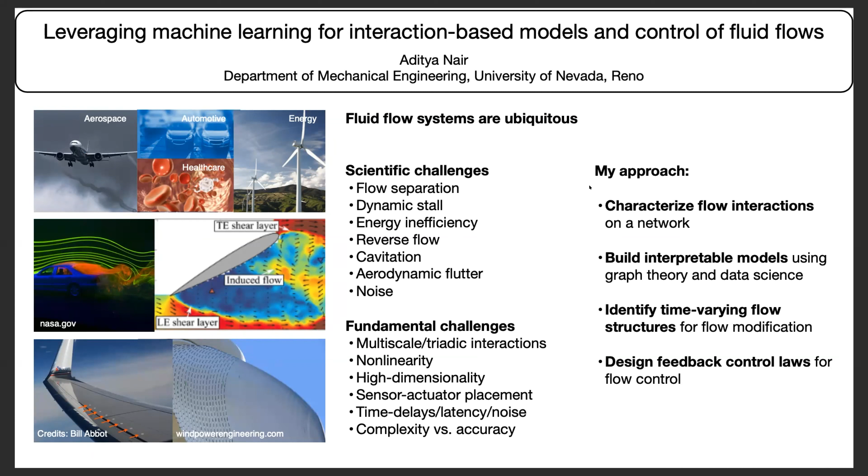My approach is going to be these fourfold points that I put out here, which is characterize these interactions on a network or a graph, then build interpretable models of these using ideas from graph theory and data science, identify some time-varying flow structures of significance for flow modification, and design some feedback control strategies.

Okay, so this is basically a big part of my PhD work. This was with Kunihiko Taira at UCLA, and my collaborator was Steve Brunton in these efforts. And if you see the left, these are some data-driven networks that we have extracted from laminar flow. So you have a body and you have a flow over the body. What we wanted to do is represent that on a network. Now you'll say, well, a network is made up of nodes and edges. What are the nodes and edges in continuum?

So what we did is we said that the modes of the flow are going to be the nodes. It was rhyming, so we were like, what the hell, let's do it. The modes are going to be the nodes, and the edges are going to be the energy transfer interactions between those modes. Kritika in the earlier talk gave a beautiful introduction on POD. We actually use proper orthogonal decomposition, or POD, to decompose the flow into modes. And then we basically perturb the flow to extract interactions between those modes. And that's what you see on the left.

And once you have the interaction graph, you can do some beautiful control, because you exactly know how energy transfers from one mode to the other. And what we wanted to achieve is this unstable equilibrium in these laminar flows, which gives you nice properties with drag. On the right, we show some physics-based networks, which is basically discretizing a turbulence network.

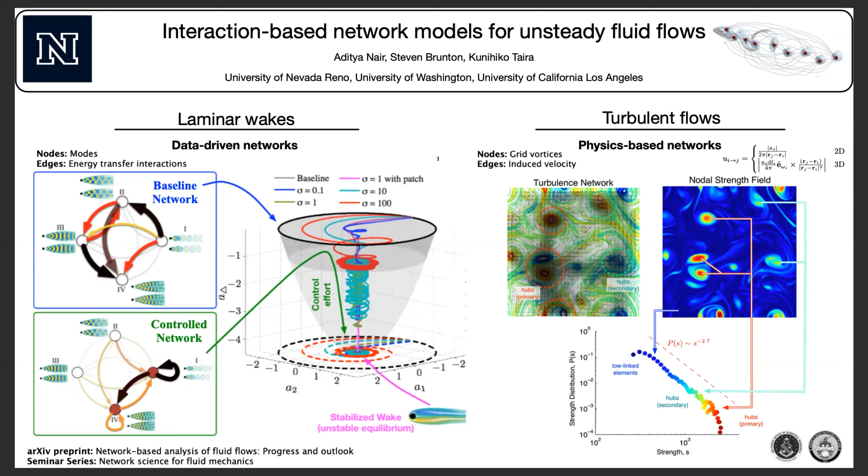Okay, so where do we go from here? We can represent fluid flow, or something that is a continuum system, on a graph. Now, where we want to go, at least in my group, is to take these ideas to multi-physics systems, in particular fluid structure interaction. So what if you have a structure that is compliant, that is flapping in this flow, and there is a fluid? Can we map the interactions between the fluid and the structure on a network? So that is kind of our initial attempt. This is just ongoing work.

I just joined UNR in 2020, so Sam is my first PhD student. So we've been attempting to build these kinds of interaction models of fluid structure interaction using a network framework. So now you ask, okay, you built these models for fluids, but how does that tie to a structure? It's not very intuitive. So what we do is we leverage ideas from potential flow theory.

And I mean, this is a theory in fluids. Basically, when you study an introductory course, usually you start with potential flow. But in potential flow theory, there's an idea where you can actually get something called the vortex-let strength of a structure if you have the structural displacement and you have an idea of what the wake vortices are. So we take a high dimensional flow, we take that information of the wake vortices and the structural displacement, and then once we have all of the information, our nodes become the vortices and the edges become induced velocity.

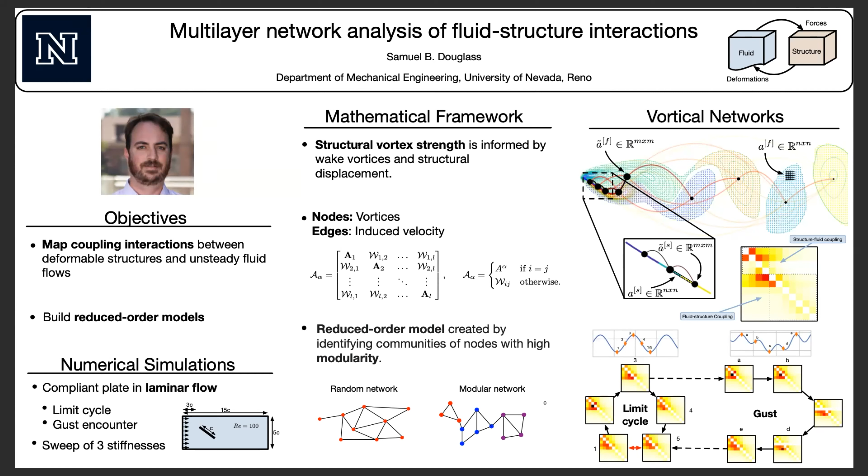And when you have that, you can actually build multilayer interaction models of these through, say, a limit cycle, so something where you have this periodic vortex shedding, or on the right, where you have, say, gusts entering the flow. So I basically hit the system with some perturbation or disturbance, and I can see exactly how this kind of network evolves over time. So, okay, you have a good representation of the interactions in this kind of, I want to say, 10 by 10 matrix. That's a good representation because, of course, if you have a fluid flow, you have a lot of degrees of freedom. It's a large system. But what more can you do with it?

What more you can do with this is you can leverage ideas from network theory to say, hey, what are the in degree and out degree strengths of these individual matrices, which is basically just a row sum and a column sum in this case, right? You can do more with it, but in this case, the out degree is just the summation of the structure to fluid coupling, and the in degree is just the summation of the fluid to structure coupling. And what it tells you is on the right of the figure. So you have two figures here. On the right end is the rigid body, and on the leftmost end is a compliant body.

Same case here. Here I have this addition of an external disturbance or a gust. So again, you have a rigid body and a compliant body. What it starts to do is it starts to identify these spikes when a gust enters the system. So that's pretty cool. As well, if you have just a periodic limit cycle happening in the flow, you can see that these in degree and out degree distributions don't have this large oscillation because there is no compliance associated with the structure. So the rigid case is pretty much flat. And then when you go to these more compliant cases, you start to see more and more periodicity or more and more fluctuations in this in and out degree.

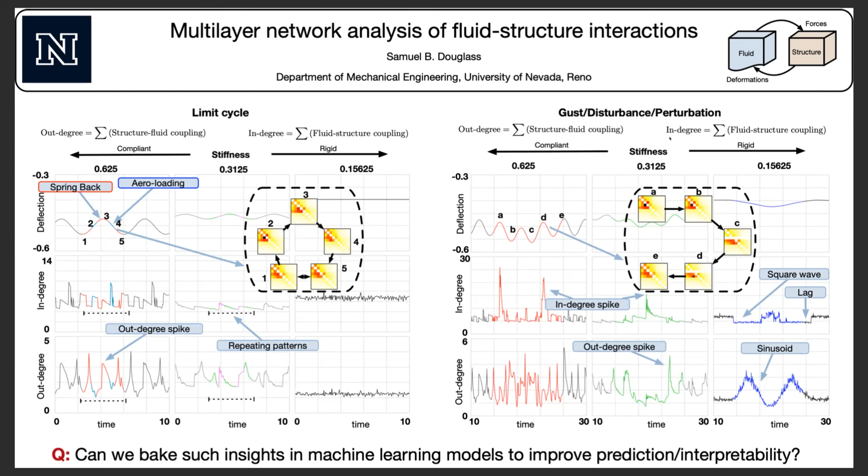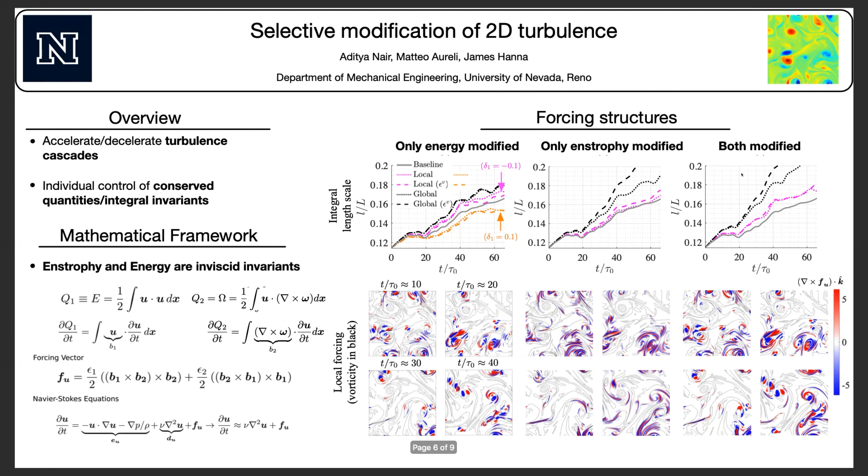It's super simple: once we can determine what B1 and B2 is, which requires knowledge of the invariants of the flow, we can force the energy of the flow separately from the enstrophy, or modify both together. So basically, there are specific structures that get excited when you only modify energy versus modify enstrophy or modify both. One of my students is working on extending this to 3D, basically 3D turbulence.

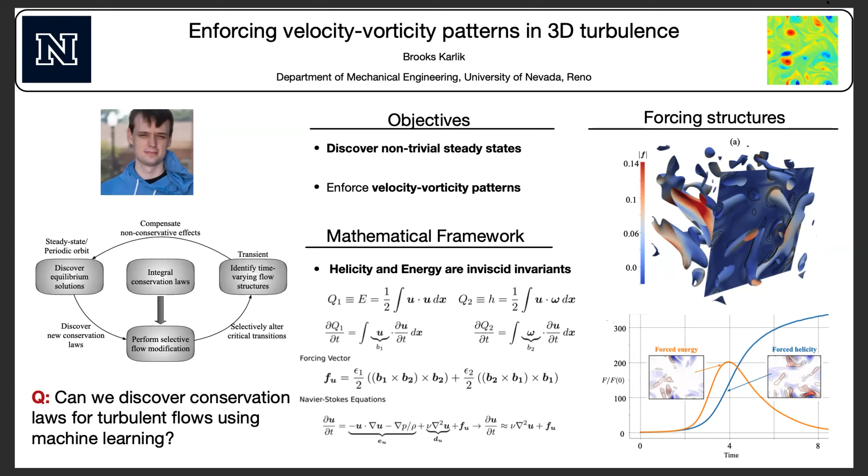So the idea is if you have an idea of what the integral conservation laws are, you can perform this approach and you can identify not only time-varying flow structures, but also discover some equilibrium solutions in the flow, okay? But again, everything that I'm showing here assumes that I have knowledge of the integral invariants or the conservation laws. But the main question that we want to drive towards is we want to discover these conservation laws using machine learning.

Okay, so this is an approach that again I'm super excited about, which is using data-driven ideas and network science ideas for flow control. Here, what I just showed you is basically a complicated flow, which is turbulent flows. We take that data, we partition that data, and we build control algorithms just from data; we basically control where these trajectories of the flow will go. So basically, I want the flow to go towards a low drag state by minimizing drag.

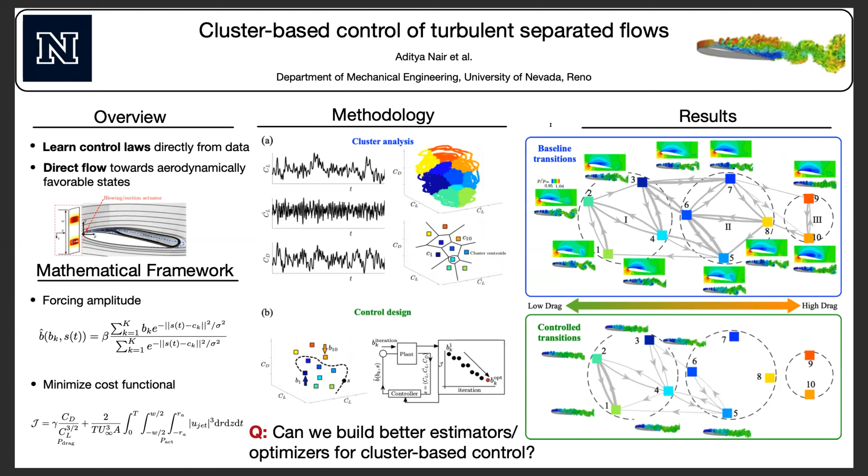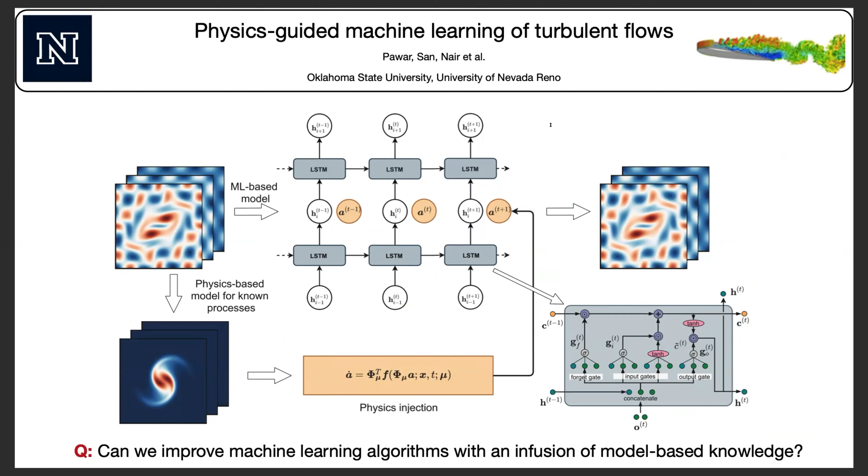So again, the idea would be, can we build better optimizers and estimators for flow control? John Wright talked about better optimization strategies. We want to leverage that for flow control. Again, there are machine learning approaches that I would like to bake physics into. So this is physics injection. Can we infuse these ideas in machine learning? We have people that are coming into my group to help related to this AI Institute project, and I give the floor to Floris for this presentation.

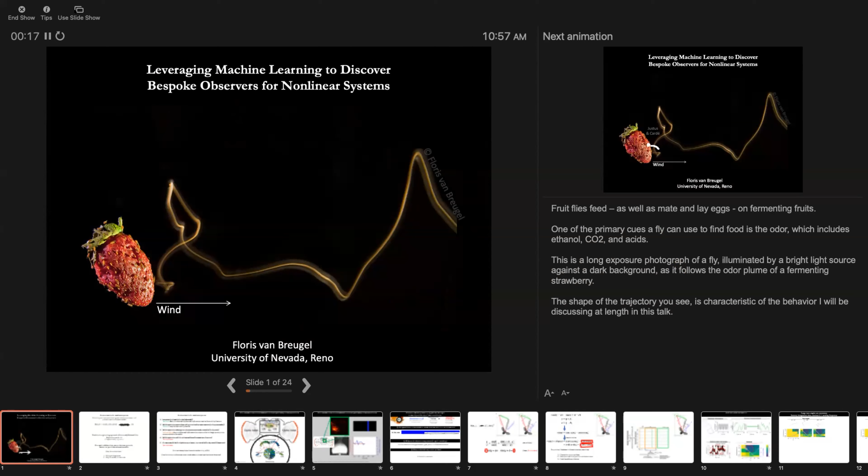Awesome. Sorry, I'm not sure exactly what's happening. There you go. The presenter, and it's not going out. Oh, I think my computer's just thinking too hard. It's still thinking. Okay, I don't know where my mouse is now. Oh, there it is. All right. There we go. Sorry for the technical issues. Can I move this guy?

There we go. Okay. So I'm going to tell you a little bit about some of the stuff I've been thinking about recently. My work is a little different than most of the people that have presented so far. I work at the intersection of control theory, data science, insect behavior, and neuroscience. I'm going to try and tell you how they all fit together in my mind. I think best when I think about very specific, very concrete problems, so I'm going to tell you about one today, a little less broad than some of the other talks we've seen.

But one of my goals with this AI Institute is to figure out ways of using machine learning and AI to take the very specific concept here and generalize it to bigger problems, and that's where I'd love to collaborate with people. What you see in this photograph is a long exposure photograph of a fruit fly following an odor plume upwind towards the strawberry. You see a couple patterns in that behavior that are very characteristic. This moving back and forth, this zigzagging, we call casting. Traditionally, that's been thought of as a mechanism to help them find the odor plume. But I think there's more to it than that.

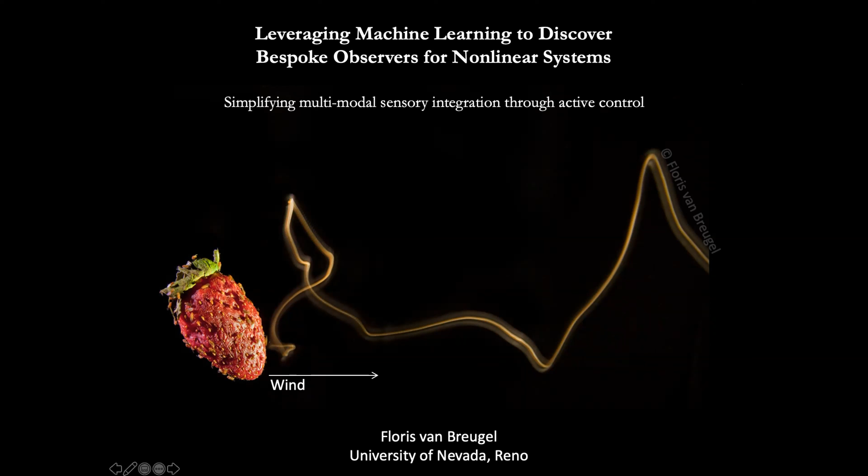What you can't see in the picture, but as a cheesy cartoon, I've overlaid a simulation of a turbulent odor plume. The challenge the insect is trying to solve is how does it figure out where the source of that odor plume is when it only has access to individual measurements as it's flying along. There's no gradient for it to follow. It's a very hard problem. A big part of that problem is for the fly to figure out where the wind is coming from, because that is generally where the odor plume is coming from. I've worked most of my PhD and postdoc on how the fly follows the plume, but now I'm interested in how the insect figures out where the wind is coming from, because that's really the fundamental problem in this challenge, in my opinion.

So this ends up being a nonlinear state estimation problem. And so for those of you who aren't familiar with this kind of terminology, what the insect is trying to do is estimate an unmeasured state given other measurements, presumably with some access to some kinematic or dynamic model. So mathematically, how do you take some, say, 3 measurements and put that through some nonlinear function and get some estimate of some other measurement that you don't have access to?

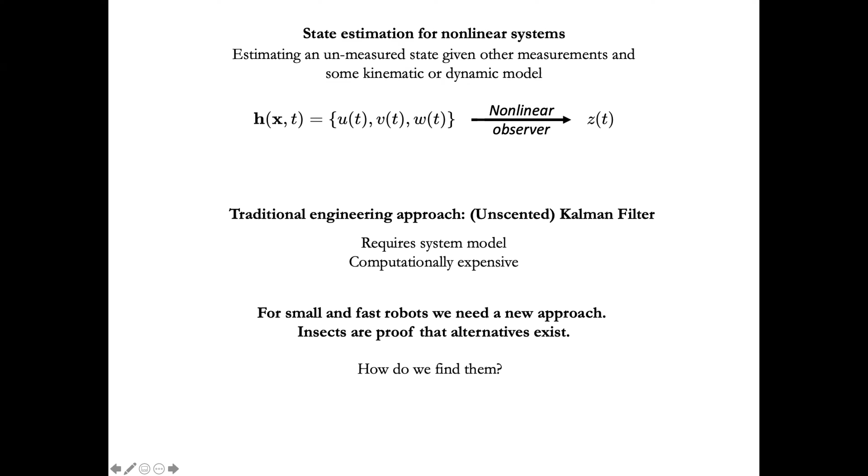So a traditional engineering approach might be to use, say, an unscented Kalman filter that requires a system dynamics model, and it's computationally expensive. And so I want ways to solve this problem that you could run on a small robot very quickly. Insects are proof to me that these alternatives do exist, but we have to find them.

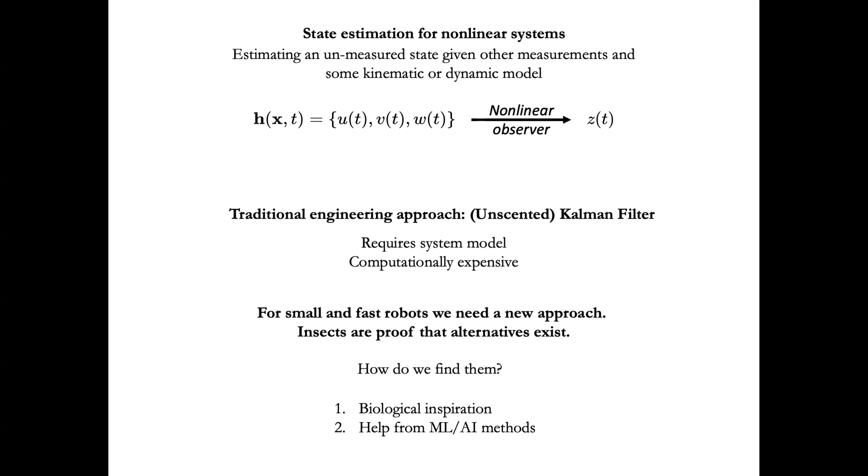And so I believe there's, in my mind, two options. One is looking at insects for biological inspiration. So that's what I'll tell you about today. But I think we can learn from that to generalize this idea using machine learning AI methods. So there's a few steps in this process. The first step is we should know whether or not it's even possible to solve the problem we want to solve. So there's tools for that, nonlinear observability, Gramians, and so forth. We're not going to talk about that today.

The next question is which trajectories are most feasible for actually solving the problem, given noise-free measurements and a system model. For that, we do have tools. The empirical observability Gramian is one. There's definitely relationships to what Krithika talked about. We're not really going to talk about that today either, because it's solved.

Then the next slightly more complicated question is which trajectories are best, given that you have very noisy measurements and you have no model of the dynamics. So that's what I'm going to mostly talk about today.

And then moving beyond that, which I'll also talk a little bit about, what trajectories enable the existence of a closed form nonlinear observer, one where you don't need a system model, you don't have to do iterative methods, you just get the answer because you've simplified the problem to the point where there is a closed form solution. And then can you do all of this just with data without any knowledge of anything else at all? So those are some challenges I think are interesting.

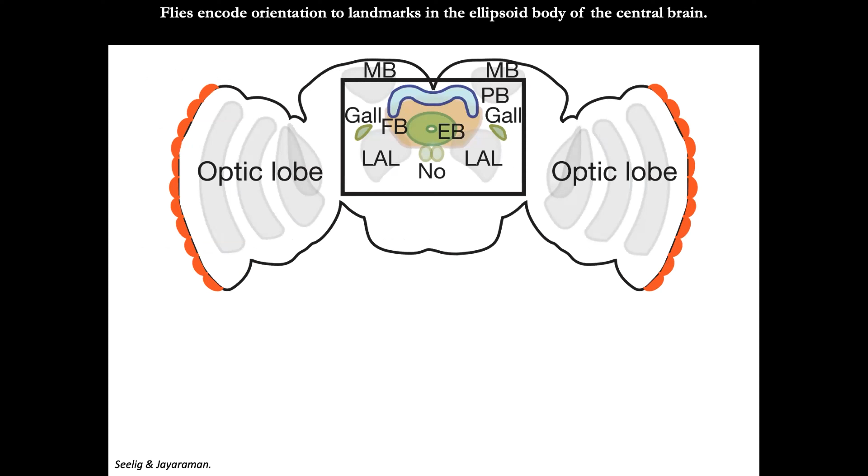So now let's dive into this concrete example. How might an insect or an insect-sized robot figure out the direction of the ambient wind given the information they do have access to? So if you look at the fly brain, we know a lot about fly brains now. And so right in the middle there's this object called the central complex, in particular, this little donut shape called the ellipsoid body. And in that region of the brain, they're encoding a lot of angular information, directions of different sensory modalities.

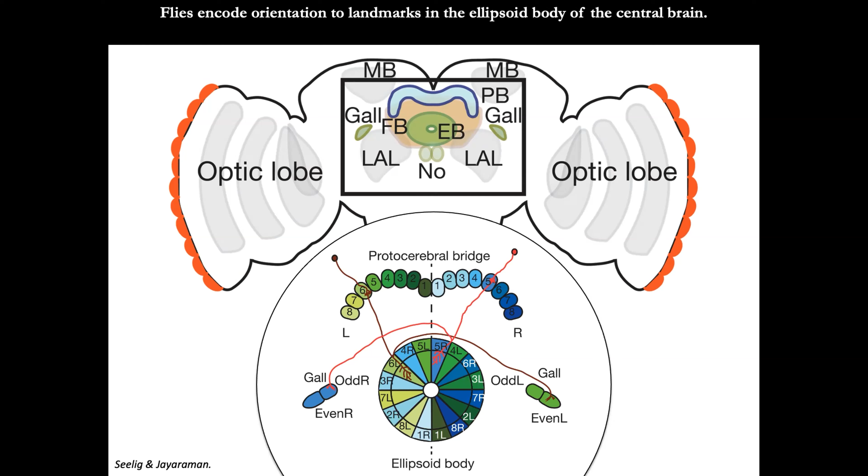So let me show you a video. This is not from my lab or anything. This is just a good video showing what is known and possible. And this is already 7 years old, so we know a lot more than this. In the upper left, you're going to see a movie of the neural activity in the ellipsoid body in the fly's brain. And the location of that little red yellow spot is going to show you where on that donut the activity is most active. In the upper right, you're going to see a picture of a blue stripe that was being shown to a fly that was in this little setup.

And the fly is in the lower left here, walking on a little ball. And so the fly is looking at the stripe. The researchers are measuring what's happening in that ellipsoid body in the fly's brain. And then on the lower right, you'll see where the blue stripe is relative to the ball. The ball's moving and the stripe is moving, and where the activity is in the fly's brain. And what you'll see is that they follow each other. So the fly is essentially encoding the location of that stripe in polar coordinates in the center of its brain.

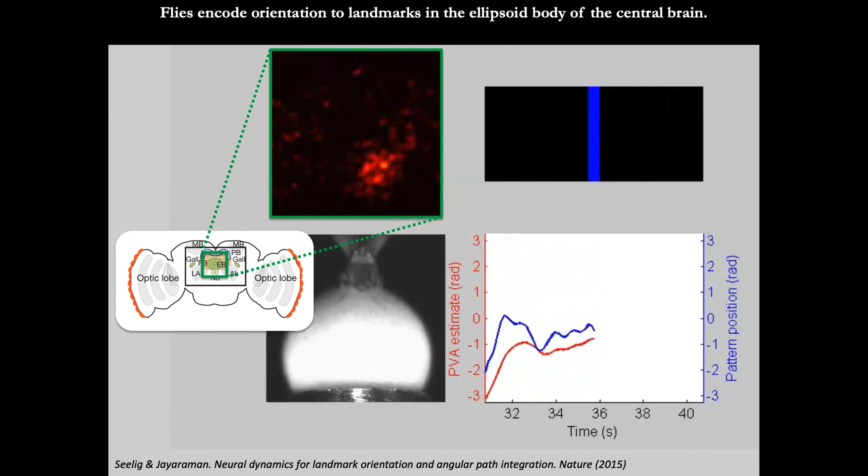Okay, so we know now that not only do they encode that head orientation relative to the world or the world relative to their head, they also encode the direction of visual motion that they're moving. And they also encode the direction of the apparent wind that they experience. And so the first question is, is it possible to extract the ambient wind direction from those three angular measurements? It's not trivial, but the answer is yes. We're not going to go into it now, but you can read my paper on that if you want to see the math.

Now, one question is, why use just those angular measurements? Well, the simple answer is that it's less sensitive to changes in sensor gain, because you've essentially eliminated that by taking the ratio of, say, the forward and sideways direction. You've kind of eliminated a component of the sensor gain. And it's also a lot easier to self-calibrate sensors. You can self-calibrate the magnetic compass in your phone by kind of rotating it around, and that's because it's all angular aspects to it.

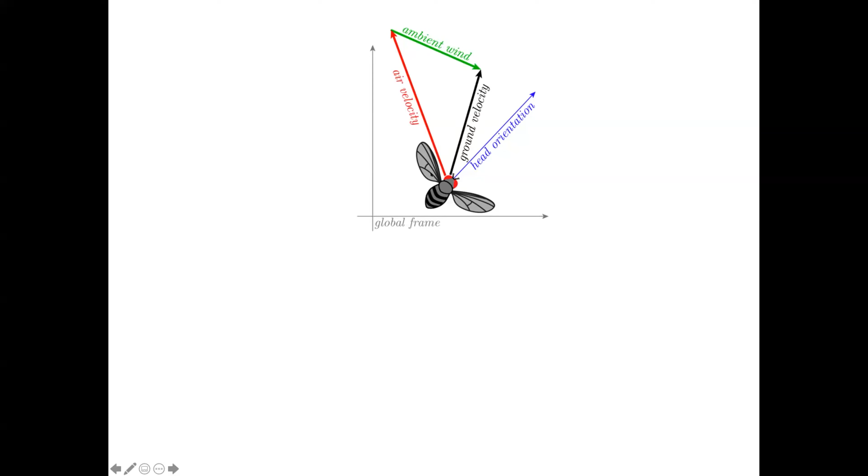So now the question we're going to focus on is, how do you do this? Or how might a fly do this, and what trajectories are best? So again, we're going to dive into some real detail here. So this is a little triangle that is the center of everything. The fly has some orientation. It's got some ground speed. There's some ambient wind blowing on it, and it experiences some air velocity or apparent wind that's the vector sum of those two.

Now, in order to do everything in angles, we have to define some angles. The key ones here are going to be the angle of the air velocity relative to its orientation, the angle of its direction relative to its orientation, and the angle of its orientation relative to some global coordinates. So those are the three measurements we have access to. We can write out a nice geometric relationship from the law of sines. We can simplify that by knowing that we don't care about what the ground speed or the wind speed is, and so we can just use a ratio of the two as a new variable.

But we only have one equation here and two unknowns, so it's impossible to solve that problem. Those are our two unknowns there, the zeta being the ambient wind direction. We can simplify things a little bit just by reducing the number of variables and reorganizing things. That'll help, because the next thing we're going to do is take a derivative with respect to time. Now we have two equations and two unknowns. So as long as we have some time series data, we can solve this problem. It is possible to solve that.

In order to solve it, I'm going to first convert it to a convex problem, so it's very fast to solve. And then I can use that formulation to determine what trajectories minimize my errors, and then we're going to find some closed form solutions. So these are really the problematic terms. We have a product of two unknowns, and that's what makes it non-convex. So the first thing we're going to do is say the wind direction is going to change slowly, so zeta dot is 0, and we can get rid of those terms. And now it's sort of convex. We're going to skip all the details.

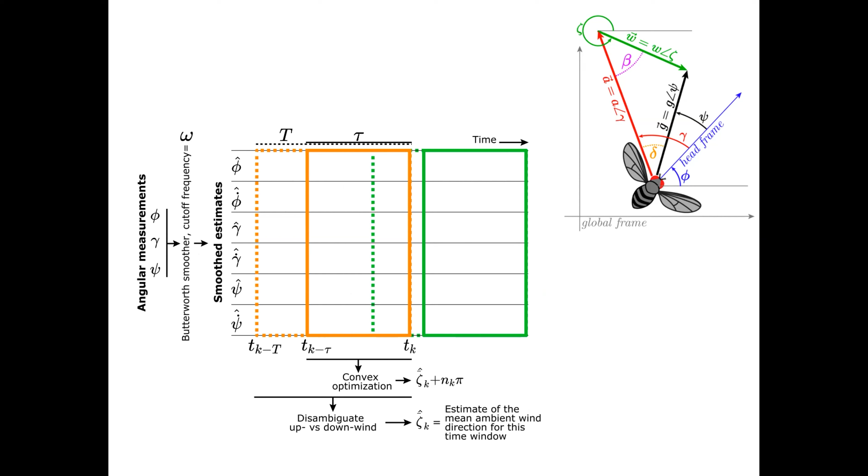So let's see it in action. Here's a sample trajectory of an agent making 90-degree turns. It's got variable ground speed. Here's a sampling of its sensor information that it has accessible, those 3 sensor directions that we have. So running it through that convex optimization routine, we can get an estimate of the wind direction, the little red dots, relative to the black dots, which are measurements of real wind that this agent was simulated inside.

We can do this for different turning frequencies, so the agent could turn very quickly or very slowly. And on the x-axis, sorry, this thing is in the way here, we could integrate information over different time periods. And you can see there's an optimal area to this. So to add a little bit of insight into what that means, I'm going to overlay two other curves here. In blue, I'm showing you the average change in wind direction as a function of this time tau.

So what this blue curve is showing you, if I can find my mouse, oh God. The blue curve is showing you that after 1 second or so, the wind has not changed very much, but after 250 seconds, there's a good chance that it's changed by 90 degrees or more. So you don't want to integrate information over too long a period of time, because then you're not going to get a good estimate.

On the other side of this red ellipse here, we have this black line, which shows you above that, you're getting more than 1 turn per unit tau. So you're collecting more information from different directions of movement in that one window of time where we're integrating information from. And so you want to kind of lie in between those sort of spaces.

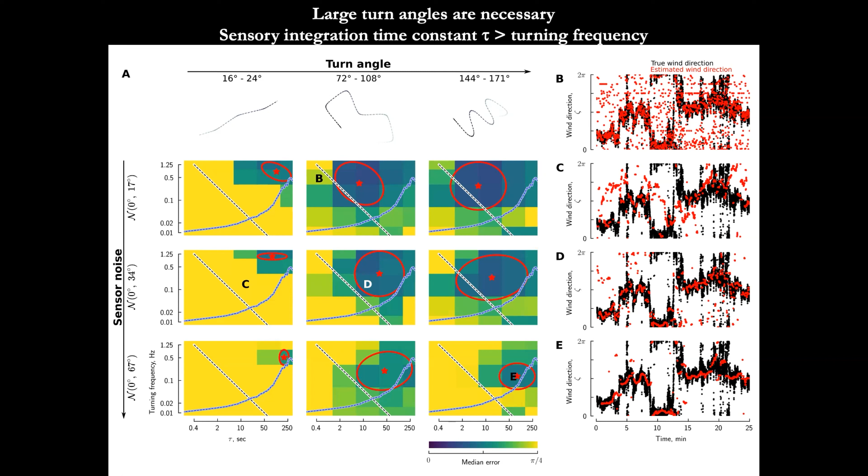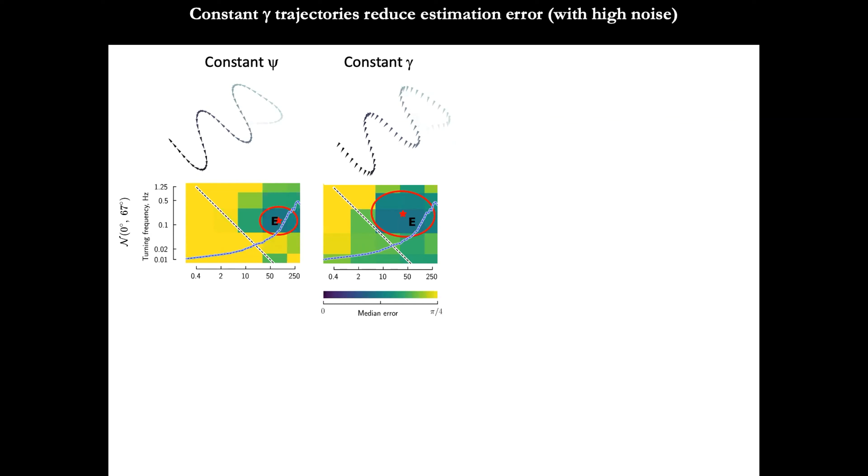And sorry, my computer is like freaking out.

So if you take these two different types of trajectories, on the left, we have the constant psi, meaning that the fly is always pointed the direction that it's moving. And on the right, we have what's happening if the fly is always pointed in the direction of its airspeed. And we can look at the mean absolute error in two of the sort of sensor estimates that we have. And for one of those, the orientation, that estimate gets much, much better, you see here, if the fly adopts a constant gamma trajectory.

And the reason for that is that its orientation is only changing very slowly, which you can see in this trajectory. And so it's a lot easier to smooth that estimate out and to take a derivative and so forth. And that ultimately enhances the accuracy of our ambient wind estimates.

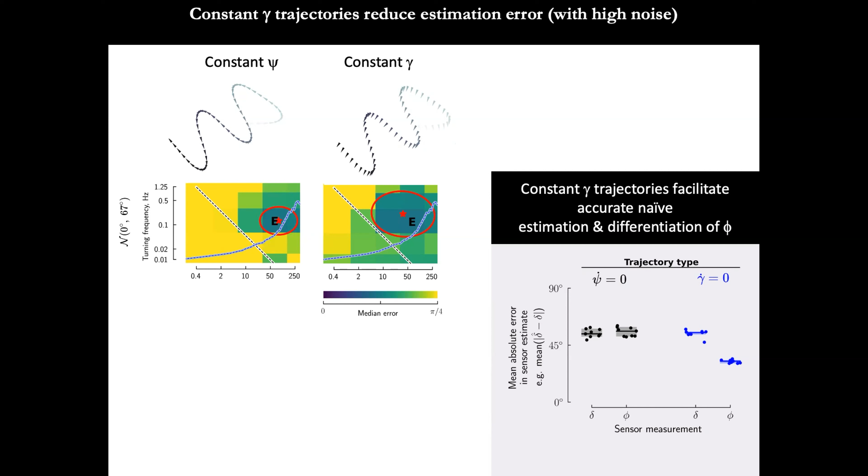So now we get to kind of the most exciting part, is all of that was based on what I consider to be a pretty computationally expensive convex optimization routine. Now, in the grand scheme of things, maybe that's efficient, but it's not good enough for me and a tiny robot. But if you introduce some control, if you say my agent has to fly with a constant ground speed, the math simplifies, and you can actually write out a closed form solution for the ambient wind direction. It comes out to kind of a nasty algebraic equation, but the fact that we can write out a closed form solution means that you could evaluate this very, very quickly.

This is with continuous measurements. If you do it in discrete time, you can get a slightly different formulation. You can reorganize that. And the only reason I do all of this is to show you in the next slide that each of these terms contains derivatives. But before we get to that, what I've shown you so far, I want to match that up to what we see in the biology.

So plume tracking flies generally exhibit these very large turns. They're generally moving with constant gamma. They're generally pointed in the direction of their airspeed. And they're also generally trying to maintain constant ground speed. So what we see the insects doing seems to be exactly what you would want to do if you want to have a very accurate and very mathematically simple estimator for the ambient wind direction. So this is still a hypothesis that we need to do some experiments to test, but it seems pretty exciting.

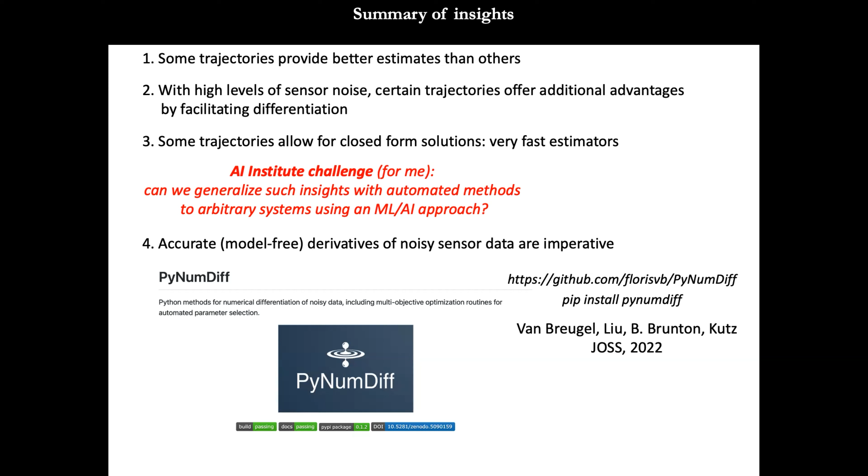And so in the last couple of years, I've been working with Nathan and others to develop this Python package, which you can now download and use. If you have any need for a numerical derivative of noisy data, I hope you try this out. I think there's about 20 methods implemented there, including automated parameter estimation routines, so you don't have to worry about that stuff. Very useful tool, I believe. Please use it. Please contribute if you find that you'd like to add something.

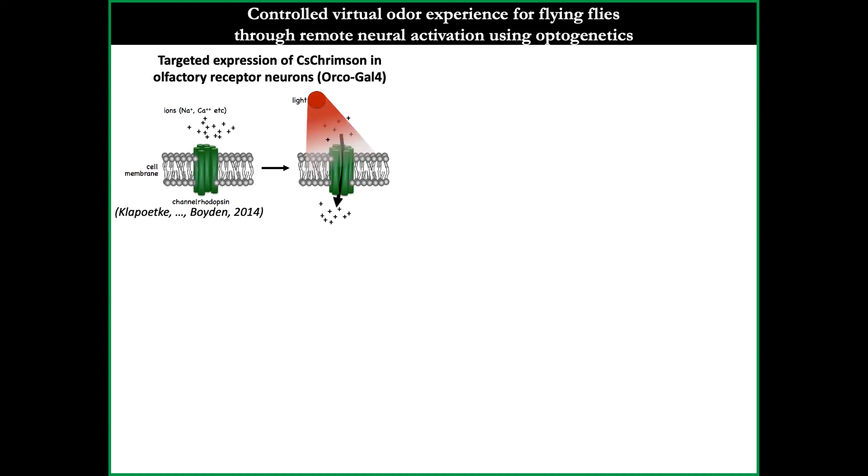And the last thing, if I have just one more minute, is just to highlight one of the other tools in my lab that I didn't talk at all about: we're doing a lot of experiments where we're using optogenetics to remotely activate neurons in the brain of a freely flying fly. So just to show you what that looks like, we can take a red light sensitive ion channel and express it in olfactory neurons in the fruit fly.

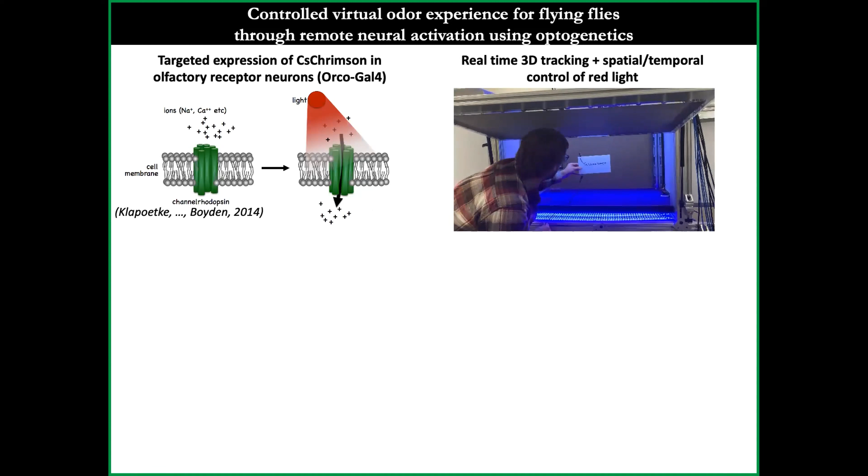We can put that fruit fly in the wind tunnel where we can track the flies in 3D in real time and then turn on bright red lights to activate these neurons, olfactory neurons mostly in our case. So here's a little video just to show, this is not with a fly, but with a little simulated tracking target showing you when the tracking target is in a particular volume, the red lights turn on. In the actual experiment, that triggers a virtual odor experience for the fly.

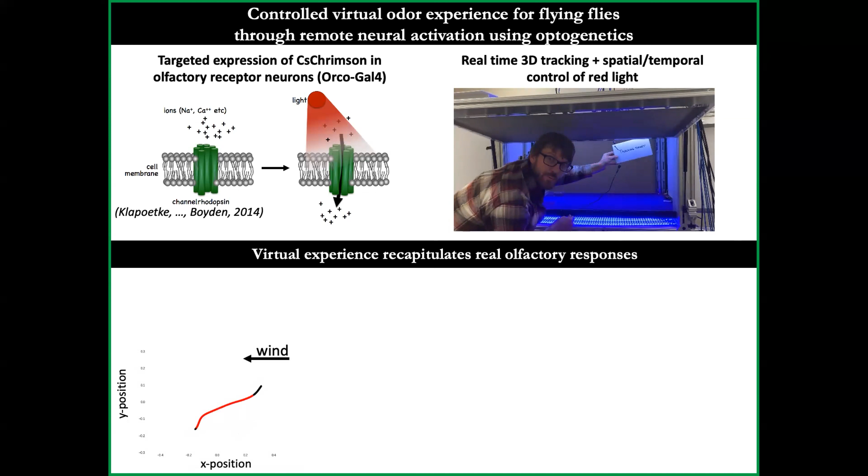So here's a little animation of what that looks like. So we had a fly flying along. It passes through some volume. The red indicates that lights turned on. And then the fly immediately turns upwind and it starts doing this casting behavior. So we're able to replicate these natural olfactory behaviors using a completely controlled virtual stimulus.